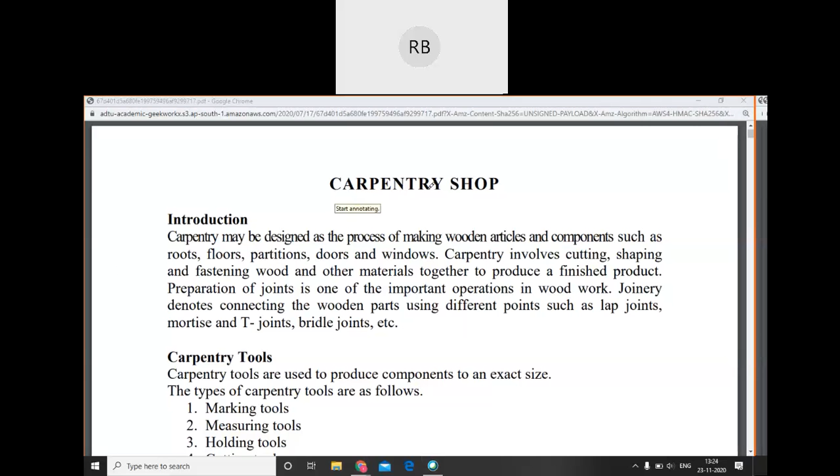Today we'll start carpentry shop. I think we have finished welding shop, right? Okay. So we'll start carpentry shop in today's class. Just go through the introduction here. I think you know what is carpentry, right? If you are dealing with woodwork, that is known as your carpentry job. Most of you have seen carpenters working at your home, doing your doors and windows or whatever.

So as a civil engineer, this carpentry part is also very important, not only for mechanical. In construction work, a civil engineer can go for construction of buildings or roads. But in case of buildings, you need to know about construction of doors, windows, and frames, everything. So practical knowledge of this particular field is also important. So we'll go through it today.

Carpentry may be defined as the process of making wood articles and components such as roofs, floors, partitions, doors, windows. Carpentry involves cutting, shaping, and fastening of wood and other materials together to produce a finished product. Preparation of joint is one of the important operations in woodwork: how we will join two or more wood products.

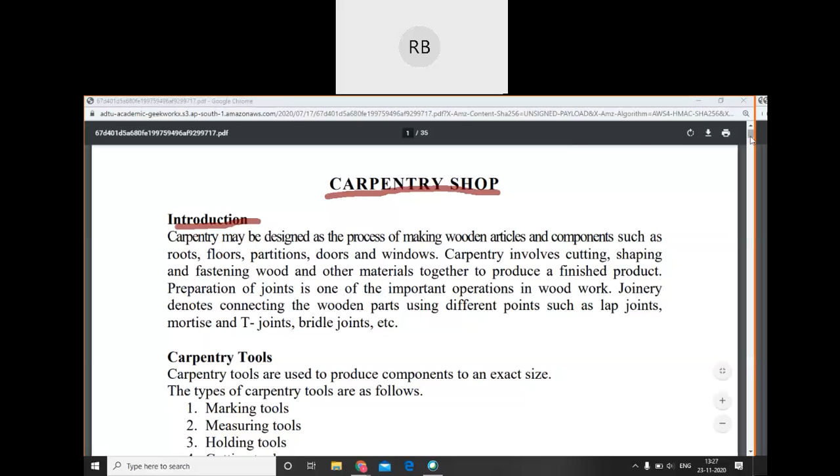In India we will see mostly people using nails. In Western countries, to join they mainly use screws and drills. Different countries have different styles of doing carpentry. I'm saying this just so that if you are interested you can go through it; otherwise we'll not cover that in our class.

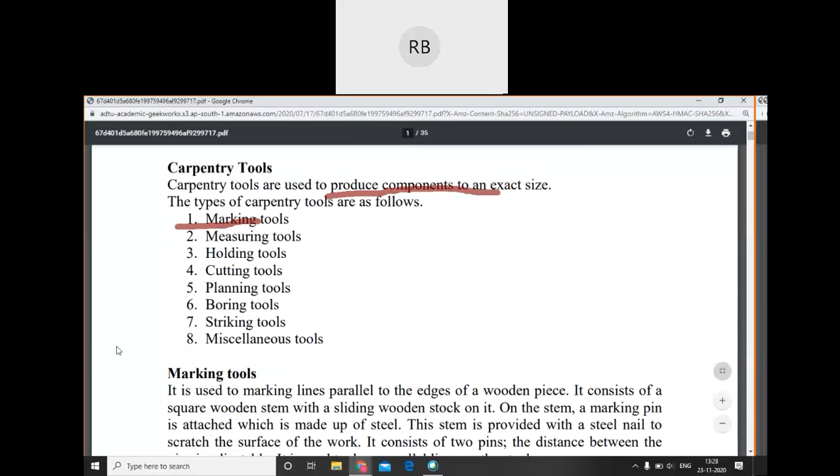So let's see what kinds of tools we have for doing carpentry. Carpentry tools are used to produce components to an exact size. The types of carpentry tools are as follows. First, marking and measuring tools. Marking means a pencil, or different pointed sharp objects; mostly in carpentry, pencil is used. A measuring tool might be a T square, a set square, or a scale.

Okay, different, or it might be a tape also. Then holding tools, there are different kinds of clamps. Okay, vices are there, different kinds of vices. So a few of the vices you will be seeing in our workshop also. Okay, there are different kinds of clamps also. Okay, all those things are holding tools.

Then cutting tools, I think you guys know what are the cutting tools, right? Like hacksaw, circular saw, like this machine, different kinds of machines, or also there are manual cutting tools also there. Okay, then planing tools, boring tools, striking tools.

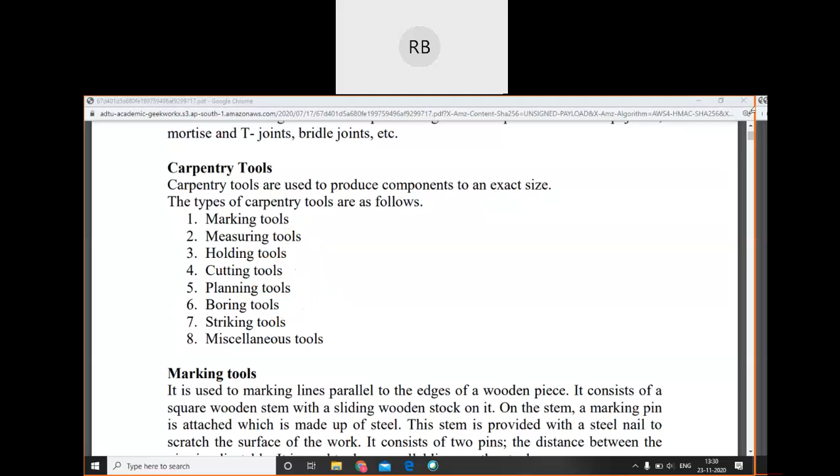Okay, now we'll go through the details of each of the tools that we have studied one by one. Okay, first let's see marking tool. Now, by the name itself, I think you understood what is a marking tool. Okay, it is basically used to mark lines, or to mark measurement, where you have to cut. Those kinds of things are done with the help of the marking tools.

So, the marking tool is used for marking lines parallel to the edge of a wood piece. It consists of a square wooden stem with a sliding wooden stock on it. On the stem, a marking pin is attached, and it is made up of steel. That steel portion looks like a needle that is protruding out of the wooden handle. Okay, that part,

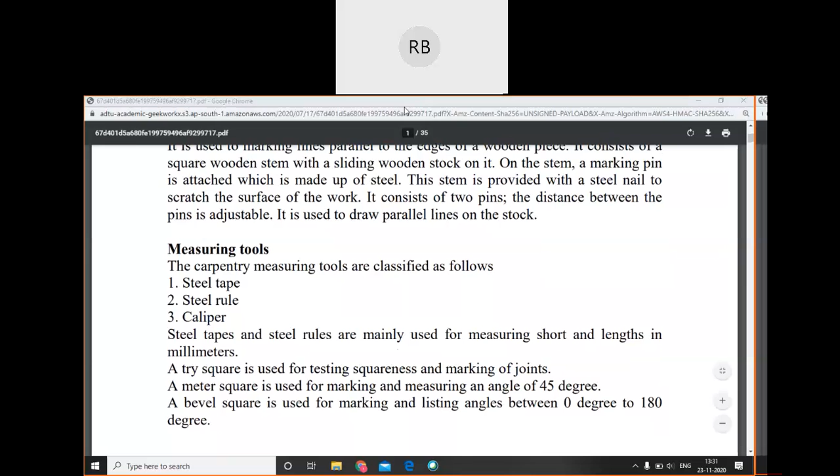Dongkong Pegu. Just hold on a minute. Okay, I have seen a few fifth sem mechanical students here. If any fifth sem mechanical students have joined the class, please leave. This is not your class going on. I have seen Dongkong Pegu here a few times. Again I'm repeating, if any fifth sem students have joined the class, please leave. Your class is not going on. This is a first semester class.

Okay, so that sharp object that is protruding out of this wooden handle is going to make the actual mark. It somewhat looks like a screwdriver. It will be having a handle, but it will be a pointed one. When you come to the workshop, you will see all the different kinds of tools there. Looking at them directly with your own eyes will be very much helpful for you.

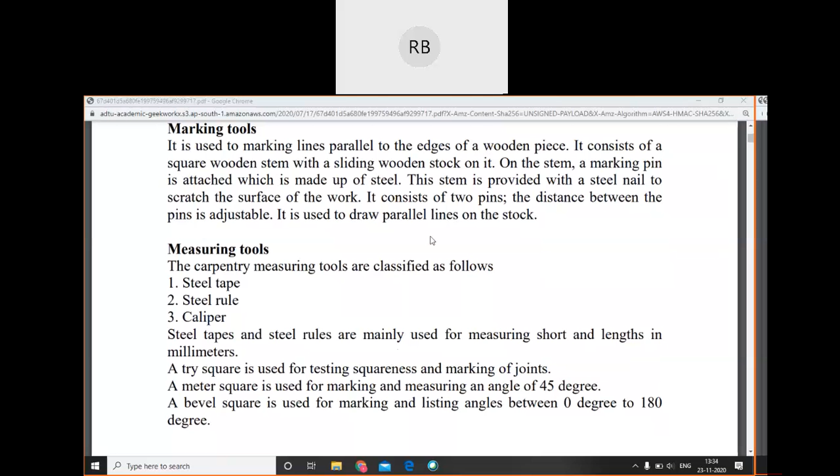You know the use of the divider, right? In the geometry box, you have a compass, set square, different kinds of things. But the divider is the one that looks like the marking tool. It somewhat looks like that, but it's a bigger version.

Okay. Then measuring tools. The carpentry measuring tools are classified as follows: steel tape, steel rule, and caliper. Steel tapes and rules are mainly used for measuring short lengths in millimeters. A try square is used for testing squareness and marking joints. Squareness means if it is a 90-degree angle.

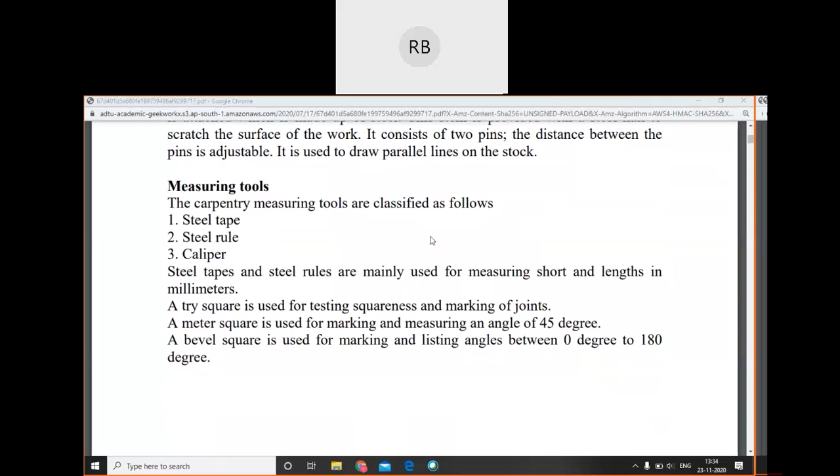Okay, a miter square is used for marking and measuring an angle of 45 degrees. And a bevel square is used for marking and testing angles between 0 degrees and 180 degrees.

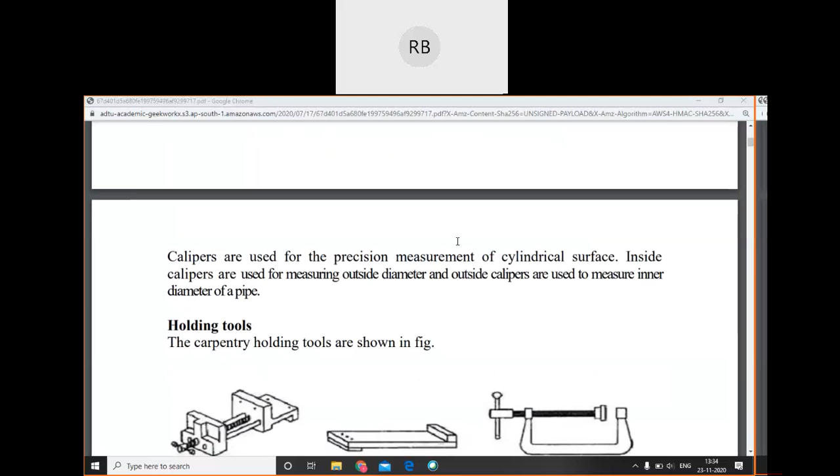Now, this caliper is used for precision measurement of cylindrical surfaces. I think in your earlier classes, like 11 and 12, you have heard of the vernier caliper, which is used for measuring the diameter of a pipe. Similarly, there are different types of calipers or gauges used for doing precise measurement of cylindrical surfaces.

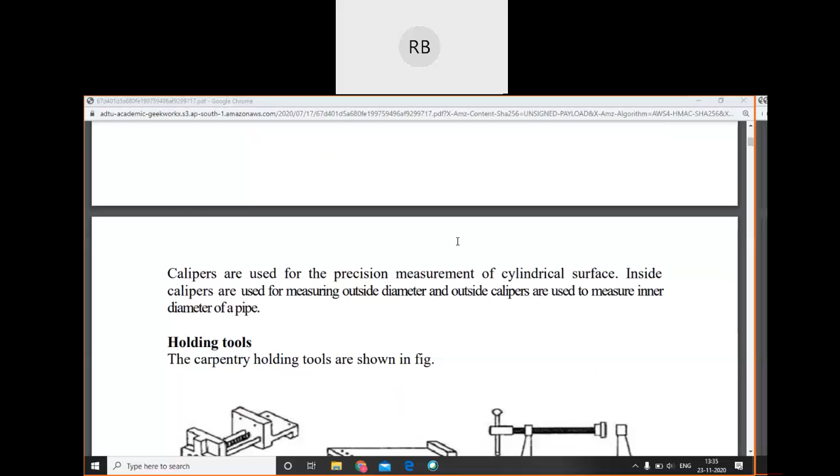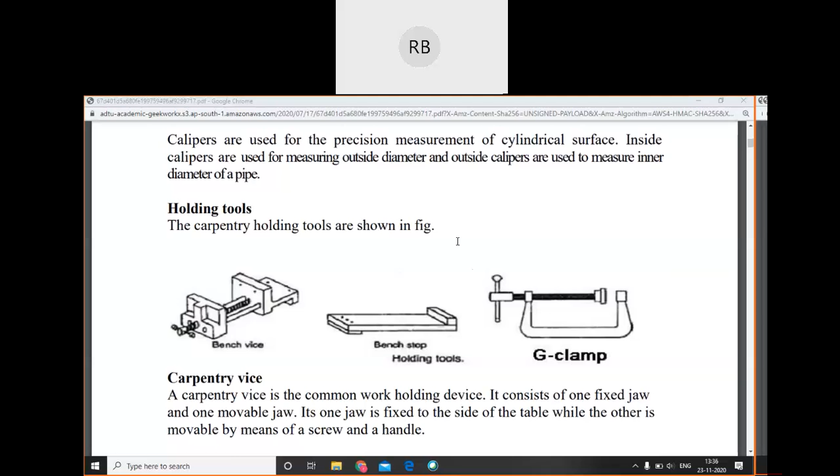Inside calipers are used for measuring outside diameter, and outside calipers are used for measuring inner diameter of a pipe. So there are two types of calipers, inside and outside. Inside calipers are the kind where you put the object inside the caliper, and outside calipers are used for measuring the inner diameter.

Then next is your holding tools. In holding tools you will have different kinds of clamps and vices, which you will also be able to see in your workshop.

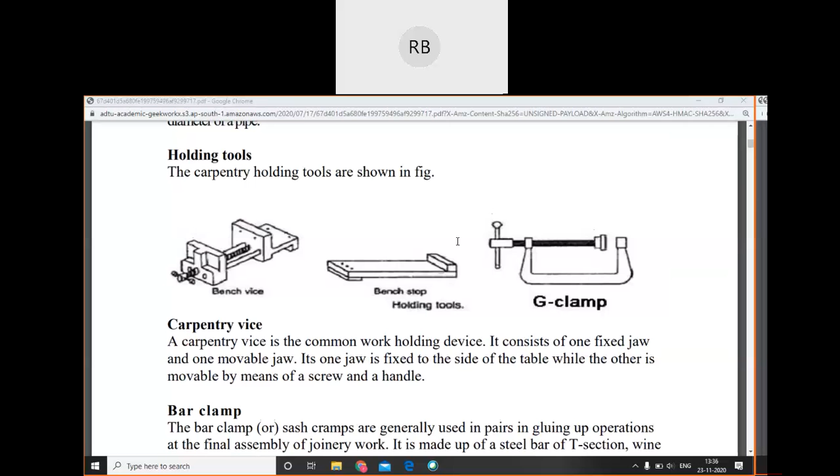The main work of this holding tool is to hold the work device. Whatever piece of wood you are working with, you need to hold it to perform the work. Let's say you are cutting the wood piece, or joining another wood piece to the one you are working on. So for any kind of process you are doing with the wood, you need to hold it still. For that, the holding tools are there.

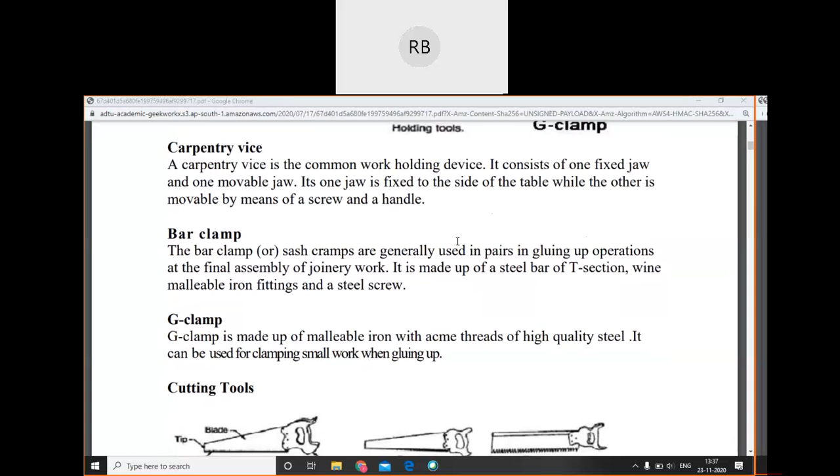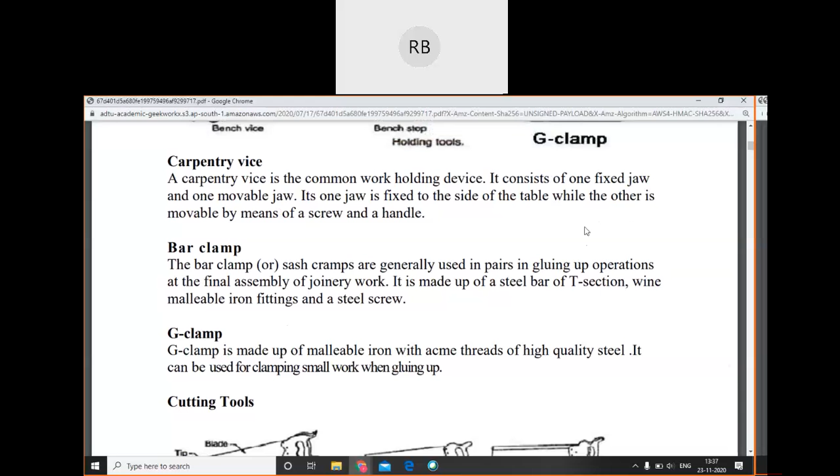Now the first is the vice. A carpentry vice is the common holding device. It consists of a fixed jaw. This bench vice is available in your carpentry shop, you'll be able to see it. It consists of one fixed jaw, and another jaw whose distance is adjustable, through which you can adjust the distance between the two jaws.

So you can either tighten the jaw device to hold the object, or release the device to remove the object. It consists of one fixed jaw and one movable jaw. Its one jaw is fixed to the side of the table, while the other is movable by means of a screw and handle. The next is bar clamp.

There are different kinds of clamps also. A few examples, bar clamp and G clamp, are given here. The bar clamp is generally used in pairs in gluing up operations. Whenever you glue a joint, suppose you have made a T joint, you need to glue it. So after gluing the joint, you will clamp the joint and let it rest for a few hours, otherwise the glue will not set properly. So this is one of the uses of a clamp.

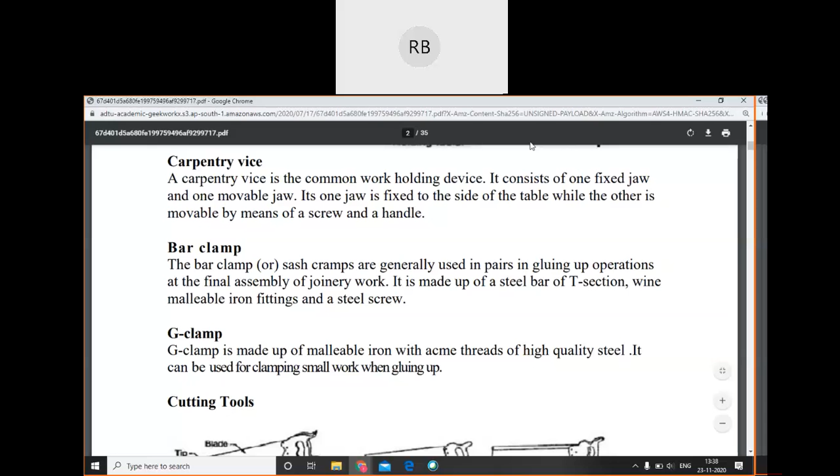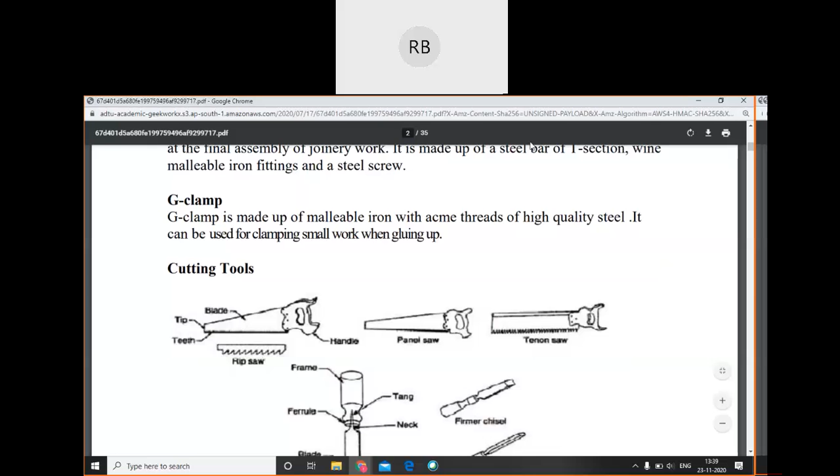It is generally used in gluing up operations at final assembly of joinery work. It is made up of a steel bar of T section, malleable iron fittings, and a steel screw. The G clamp is made up of malleable iron with acme threads of high quality steel. It can be used for clamping small work when gluing up. Most clamps are used for gluing up operations.

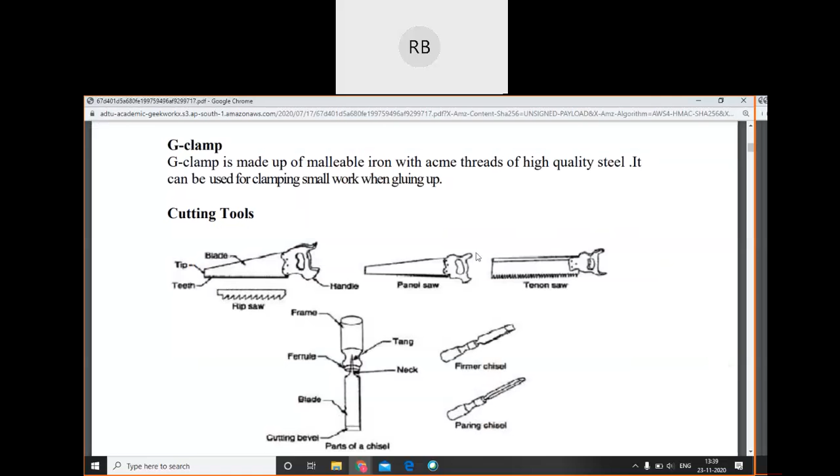The next is your cutting tools. I told you there are different kinds of cutting tools like saw, hand saw. In hand saw also there are different kinds, like you can see here, rip saw, panel saw, tenon saw.

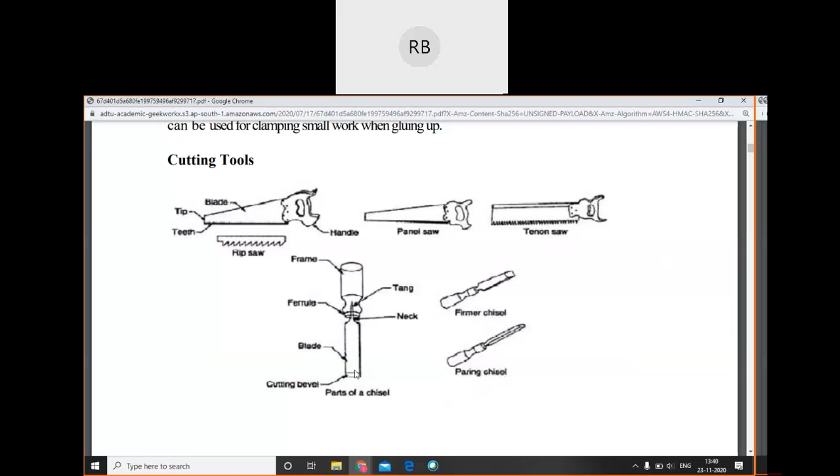Then you have chisels. I think you know the difference between a saw and a chisel. Where you need to make small grooves or finish a small rectangular section, you have to chisel out of the wood, then you will be using a chisel. If you want to cut through and through, you will be using a saw. So for different cutting operations...

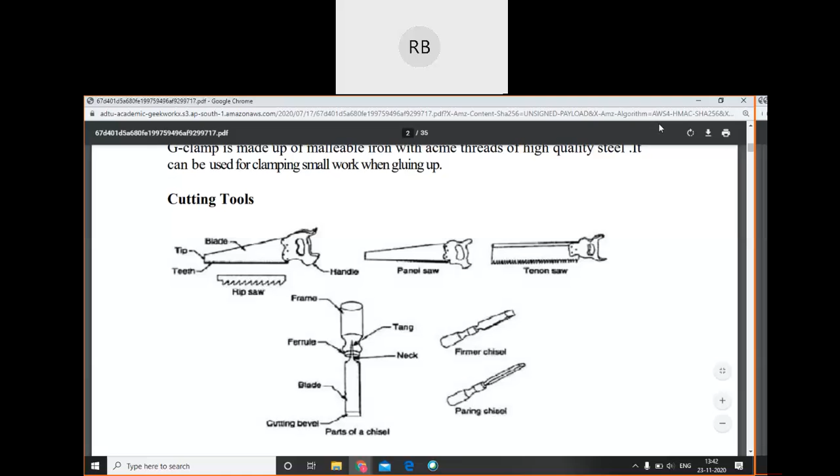Okay sir, thank you sir. Sessional exam is not very hard, you don't have to worry too much about it, okay? Okay, thank you sir.

Anyway, your syllabus is not very difficult also. Mainly workshop practices is a practical subject, so the theory part is not very difficult either. Whatever notes you are getting in the ERP, go through them. At the end, I'll give you a few websites also from where you can have practice. We'll provide you with assignments also, so that you have a better understanding of how multiple choice questions can come, or how we can make multiple choice questions from the notes we have. Those kinds of assignments we'll give, so you won't have too much problem for the exams, okay?

Okay sir, thank you, okay sir.

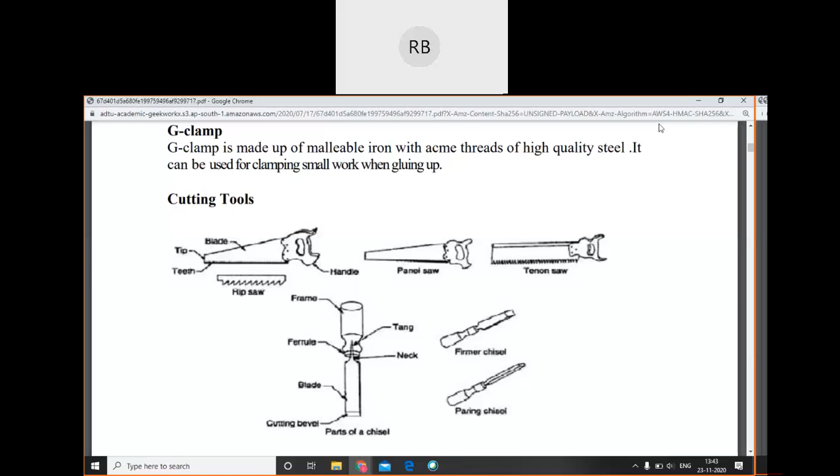Okay, cutting tool - do you understand? To cut, meaning, if you have to cut, you'll be using the saws, okay? Chisels you will be using for making small grooves.

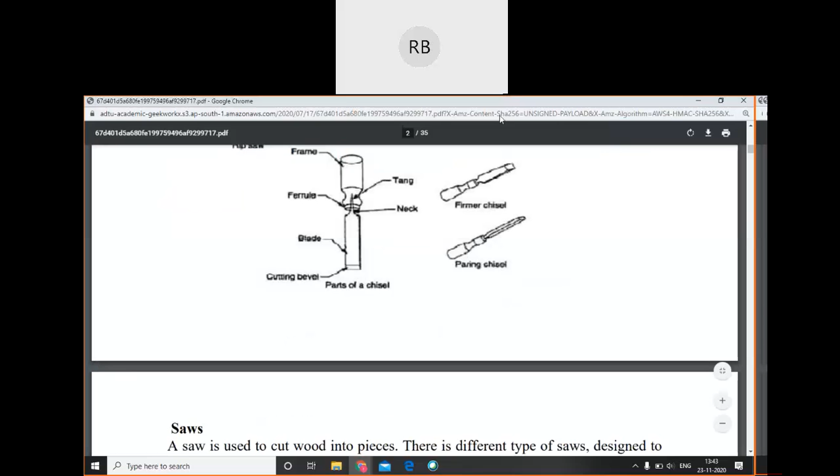Just hold on a minute, someone is waiting out in the lobby.

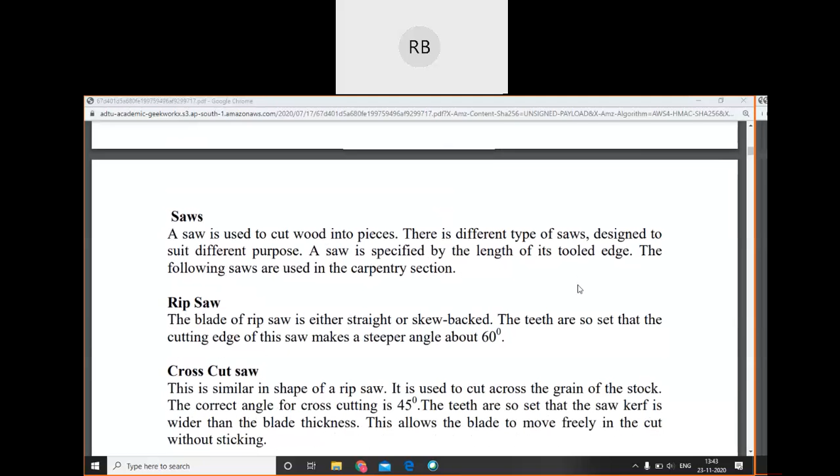Okay, now let's see the details of different types of cutting tools. Now, though I have simply said saws, the saws are used for different kinds of cutting through and through of a wood, but there are different types of saws.

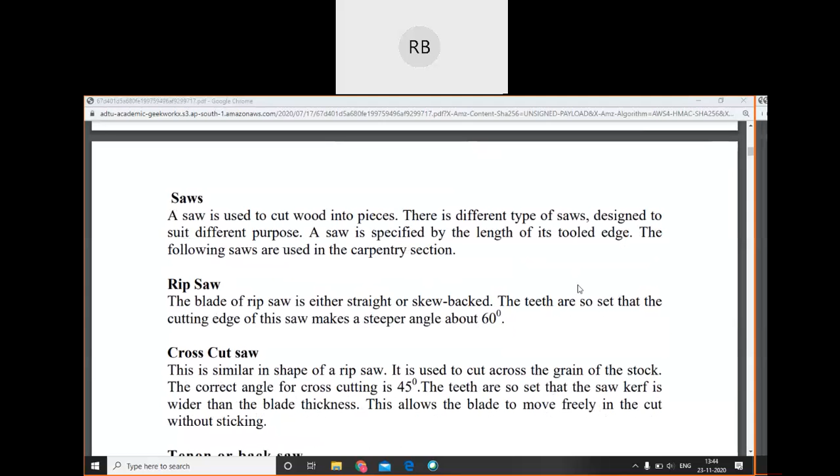Now the thing is, again, since you have brought up the topic of sessional exam, I am telling you from the point of view of the sessional exam. See, questions might come as multiple choice questions. They might come like, which one of these is not a type of saw? Let's say I have given rip saw, crosscut saw, tenon saw, and some other name.

So you need to know all the types of saws here. Or I can say, you have to go through this carefully also. Let's go through the rip saw properly. The blade of the rip saw is either straight or skew back. The teeth are so set that the cutting edge of this saw makes a steeper angle, about 60 degrees. Now, a multiple choice question might come asking which saw's teeth are set such that the cutting edge makes a steeper angle of 60 degrees.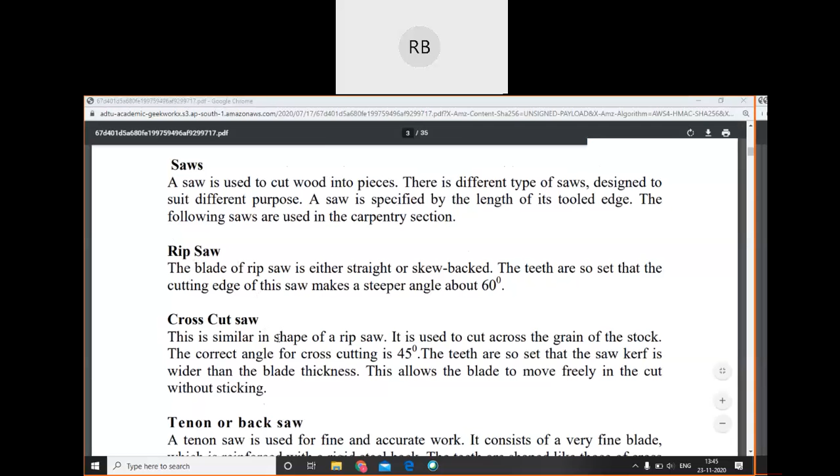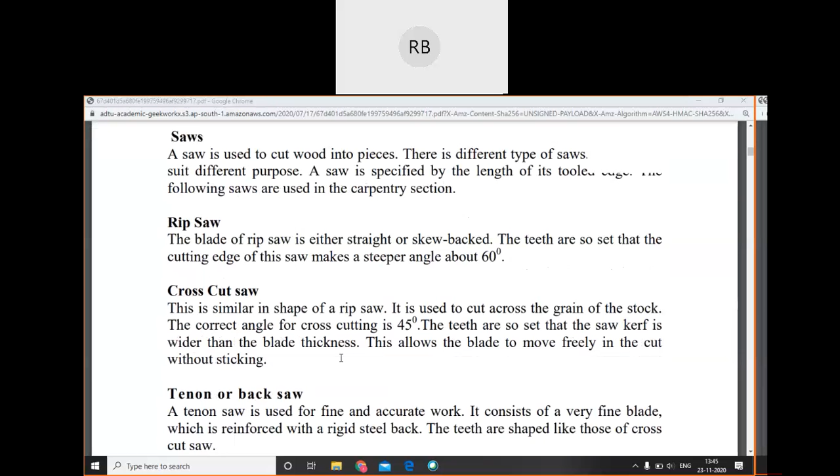So there also I will give you multiple choices like rip saw, crosscut saw, then tenon saw. But in that case you need to know each and every definition of each saw properly, right? So are you getting an idea how questions might come for online exams? Since this is the first time you will be giving online exams, are you getting it? Yes or no?

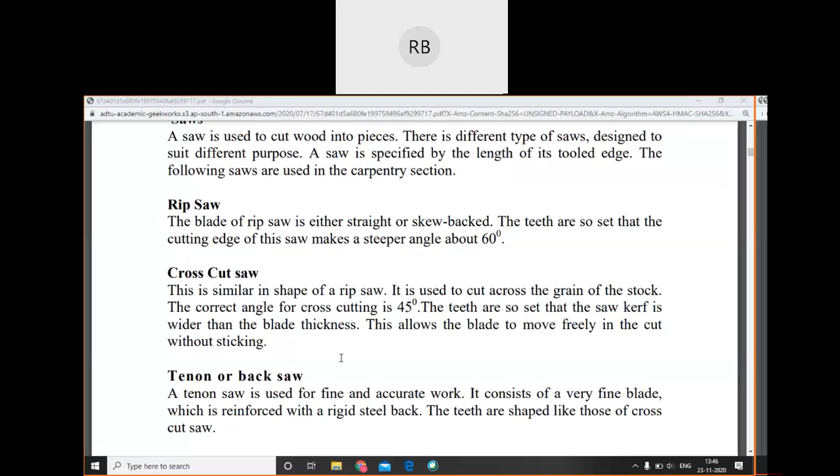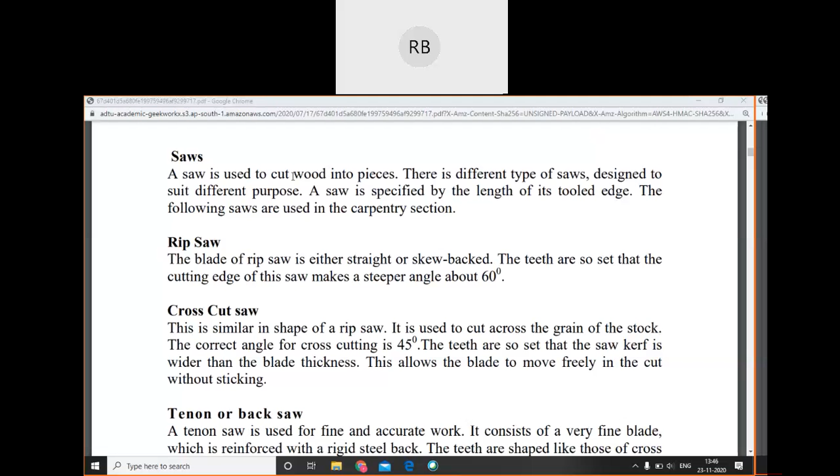Okay, so there are different kinds of saws here. A saw is used to cut the wood into pieces. There are different types of saws designed to suit different purposes. A saw is specified by the length of its tooled edge. The following saws are used in the carpentry section.

First one is the rip saw, the saw I told about just now. Second is the cross cut saw. This is similar in shape to a rip saw. It is used to cut across the grain of the stock.

The correct angle for cross cutting is 45 degrees. The teeth are so set that the saw kerf is wider than the blade thickness. This allows the blade to move freely and cut without sticking.

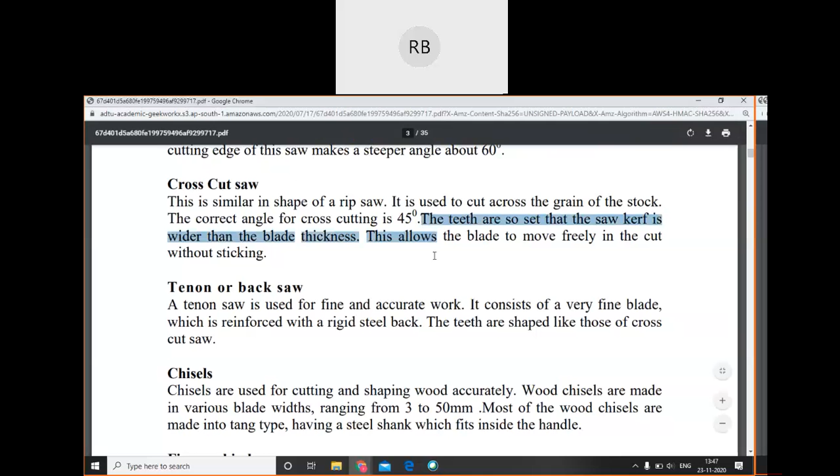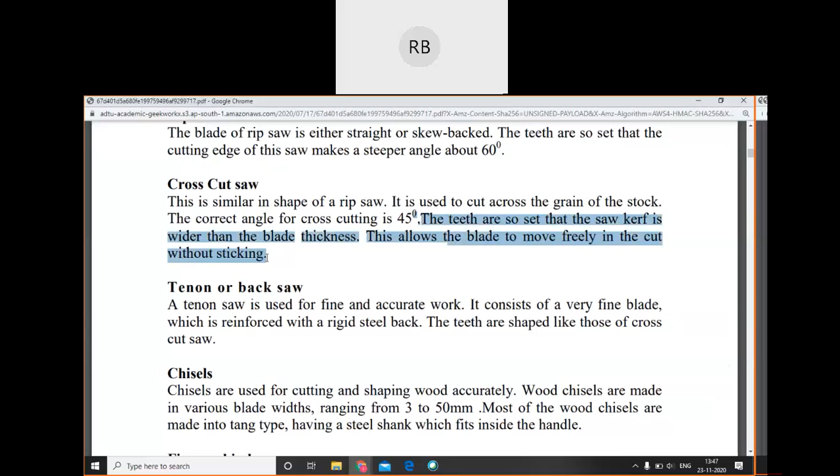I will explain this better in the next class with pictures of these saws. Whatever they are saying in this line, if I am able to show you a picture of it, then you will better understand it. So in the next class, please remind me to discuss this in detail with some pictures. If you understood, or if you can search on the internet yourself, that's fine too. But if anyone still has doubts, remind me to show the pictures and I'll try to find some good ones.

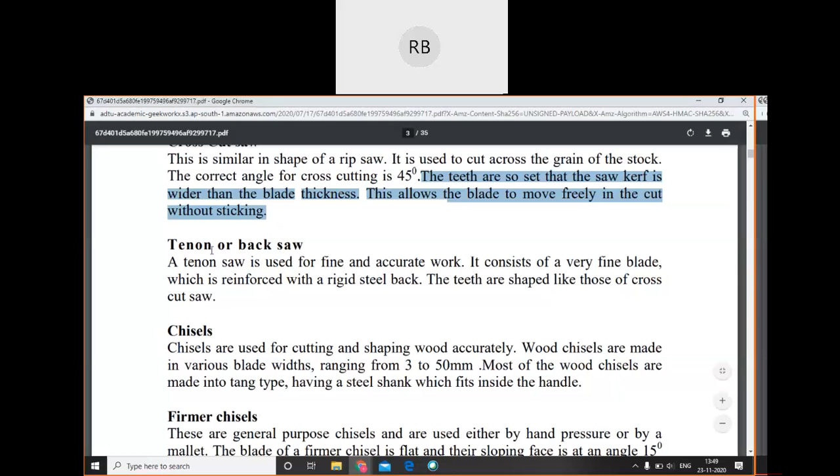Even if you have experience cutting wood yourself at home, you'll know that the gap created while cutting is a little bit bigger than the thickness of the blade itself. Why? Because the teeth of the blade protrude outside in both directions, left and right. So the thickness of the cut will be a little bit bigger than the blade thickness. Otherwise, if the teeth are made straight, the cut thickness would be exactly the same as the blade thickness, and a lot of resistance would be produced. Your blade would also heat up and you would need greater force to do the woodwork.

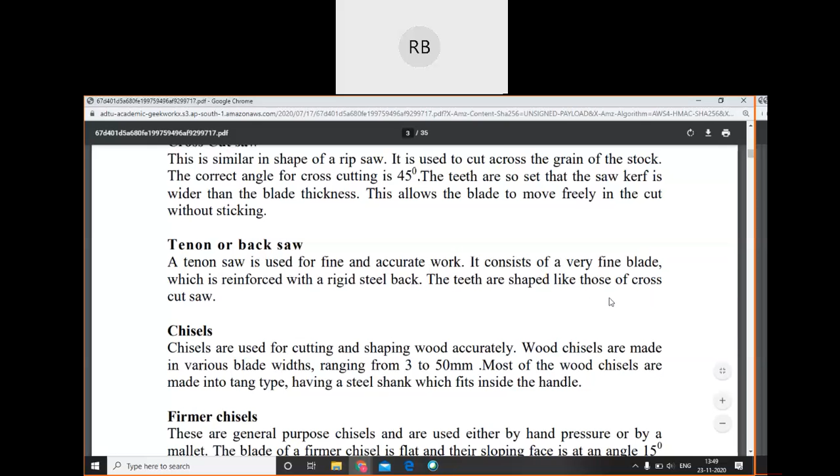Next is your tenon saw or back saw. A tenon saw is used for fine and accurate work. It consists of a very fine blade reinforced with a rigid steel back. The teeth are shaped like those of a crosscut saw. Next is chisels. Chisels are used for cutting and shaping wood accurately. Wood chisels are made in various blade widths ranging from 3 to 50 mm.

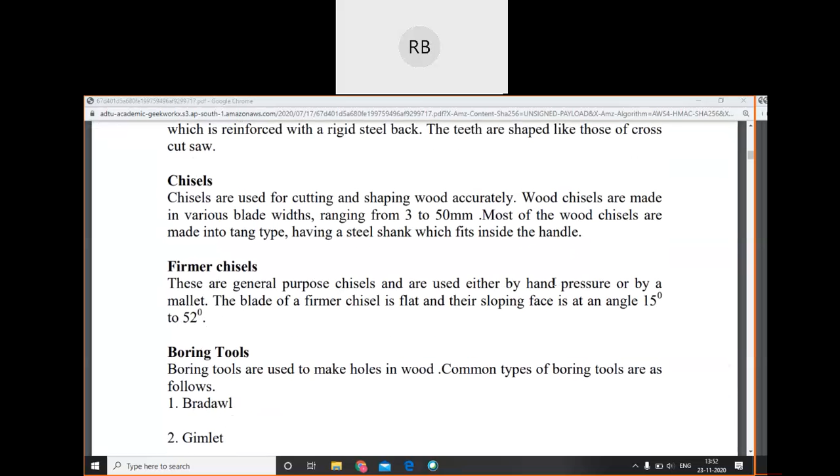Anyway, most of the wood chisels are made tang type, having a steel shank which fits inside the handle. Okay. Then firmer chisel. These are general purpose chisels and are used either by hand pressure or by a mallet. Mallet is also a kind of hammer only, but most of the mallets are made up of wood. Okay, they're mostly used for hammering these kinds of tools only, like chisels and all this.

Okay, I think you have seen a mallet. Most of you have seen a mallet in the kitchen. It's used for making chicken breast, to level the chicken breast, mallet. If you haven't, just search on the internet. Okay.

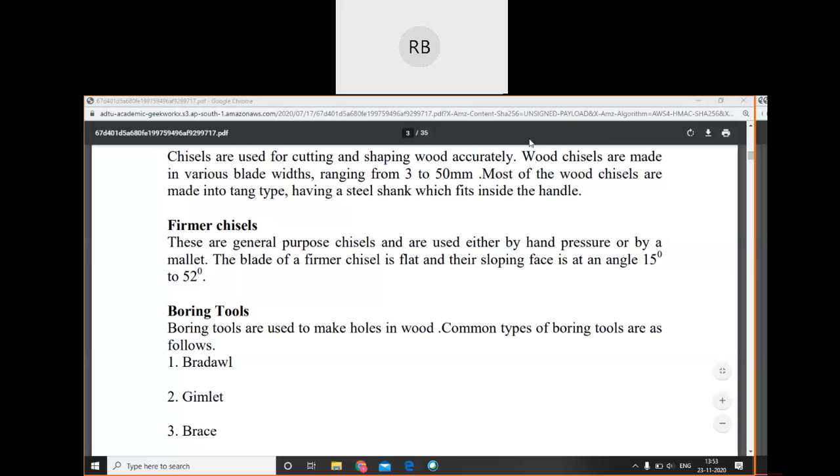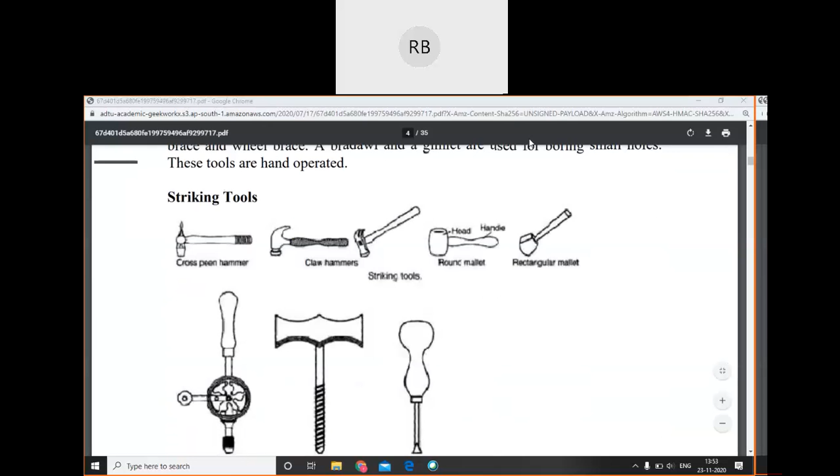Then the blade of a firmer chisel is flat, and their sloping face is at an angle of 15 to 52 degrees. Okay. This boring tool and other tools we will discuss in the next class. Striking tools, boring tools, these hammers are there. All these things we'll discuss in the next class. I think your practical class will also start in a few minutes. Okay.